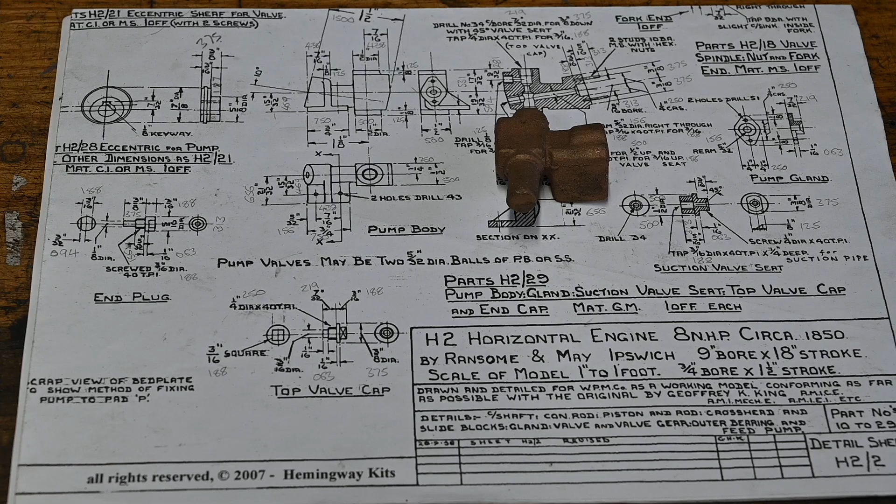Alright, today's project is the pump body, the gland, the suction valve seat and top cap. These are the little caps and end plugs, etc. This is the main part that you see here.

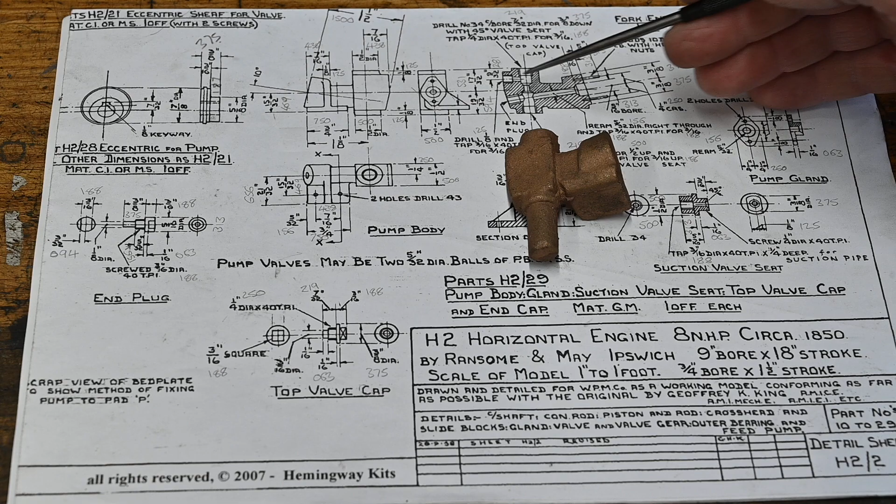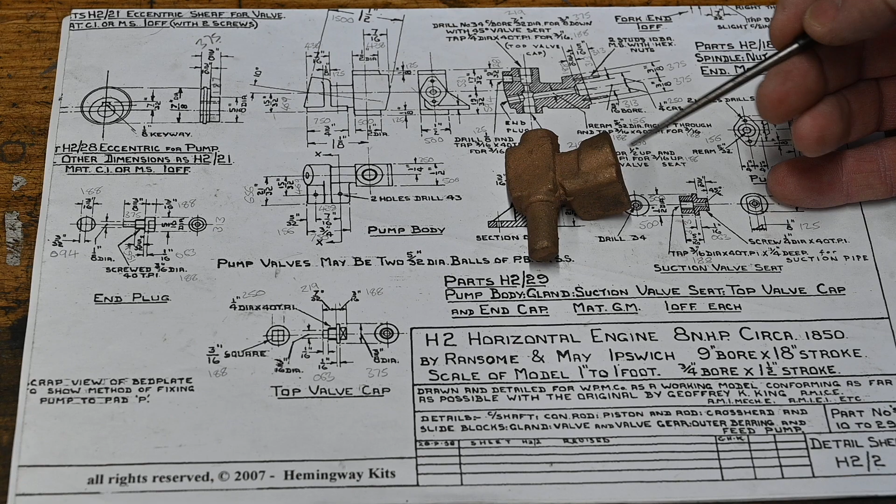Quite an interesting part. We've got a 10-degree bore through there. We've got one bore in that direction, one bore in that direction, another one in that direction. They're all reamed out to a larger size to accept a thread. Same with this end, and then there's also the pump gland which goes on this end, which is the rod that goes out to the eccentric.

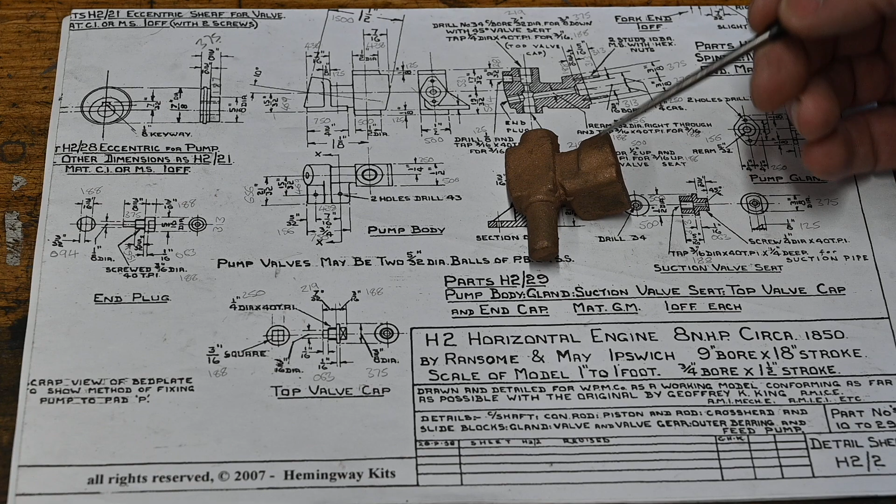There's the pump gland. I'm not sure how many of these little bits will get done in this episode. Depends on how long this takes me. Got a little bit of fettling to do on this casting first. It's got a tail piece for chucking it, but I don't really think I'll need that because I'm not going to put it in the lathe.

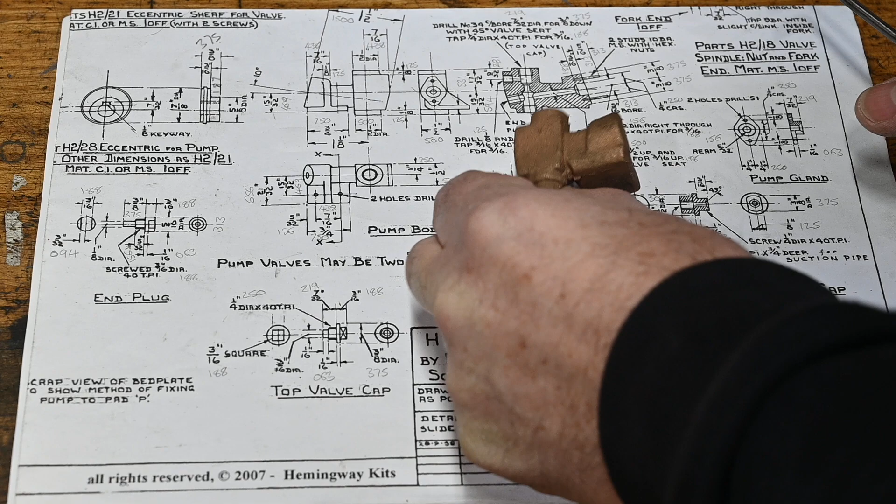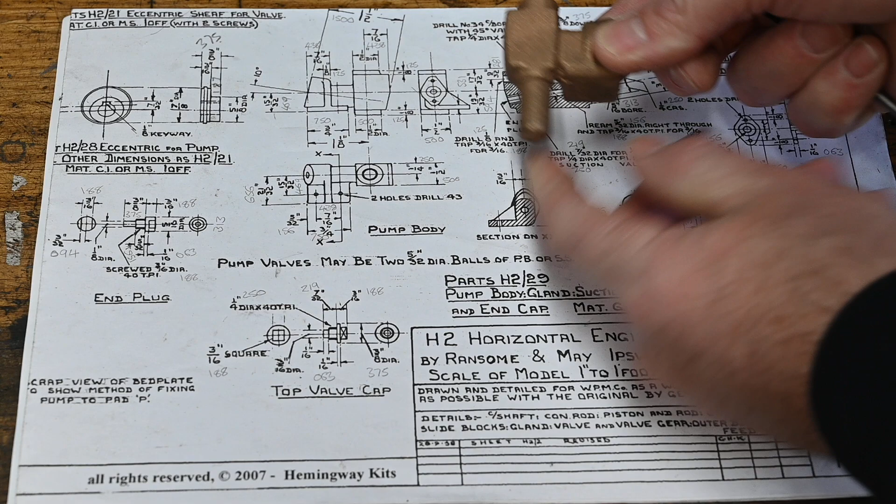I think I can do everything I need to do actually in the mill, and by chucking it, the only thing you can do is to turn that to a better round. So I may or may not do that, I'm not sure. It's not important. You can't turn this one to a better round because the foot, this is the foot that goes onto the mount, because the foot will hit the tool before the tool hits this bit as it spins.

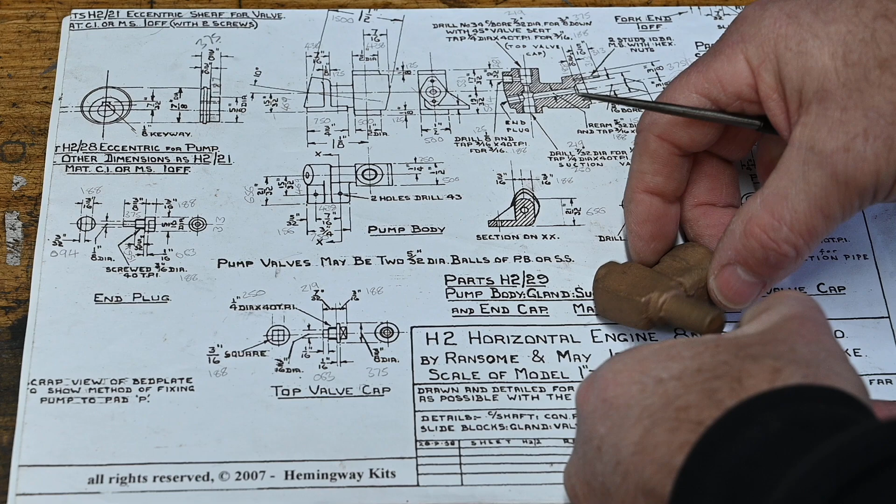So that's not really a great deal of use, so I might just cut that off and start directly in the mill. Right, so that's the orientation, that way for that way. So we'll get these faces machined off, get it fettled up a little bit, and I'll be back when I'm set up in the mill.

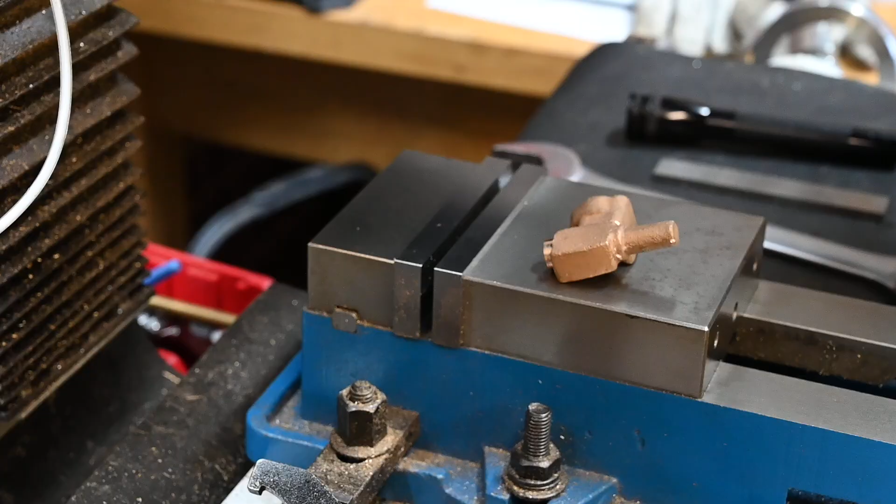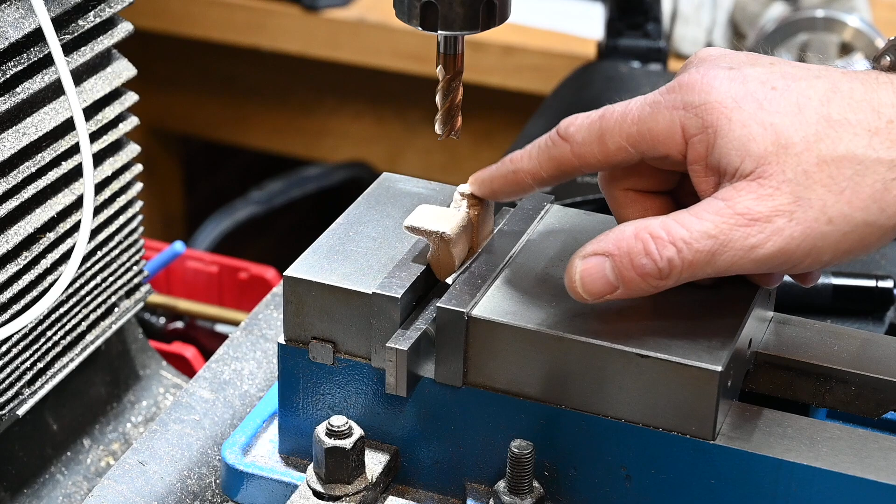I decided to put it in the lathe after all and use this just to create a little reference surface. So now that's my initial reference that I can use to get other reference surfaces when I start machining it. Right, I've got it set down on the reference face, so I can now machine this face, might take a skim off there. Although I can't see any benefit to that. No, I won't. I'll just machine that face and that face.

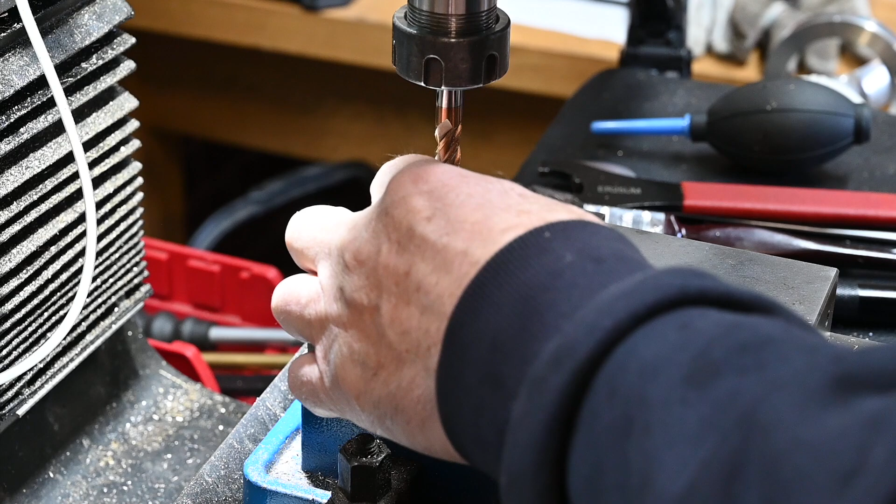I might take a pass along the back just to give me a reference surface there. Right, I've now got two reference surfaces there, a reference surface there, so I can now sit this edge down on the parallel along the back. And clamp on the other two reference surfaces. A smaller parallel in there.

Right, I could sit it on this reference surface that I've machined on this bottom edge, and I can clamp on these two reference surfaces in the vise. Now I can machine this surface as a reference surface. Reference surface complete.

Right, I now need to set this up to 10 degrees. So I've got my reference surface here that I can put against the back fence. Put that in there for now. I'm going to set it up on this ball bearing. Hopefully I can clamp it with that. Yep.

And now I want to set it to 10 degrees using this reference surface. So I'm going to put a parallel on the bottom there. Put my 10 degrees on there. Tap that into my 10 degrees.

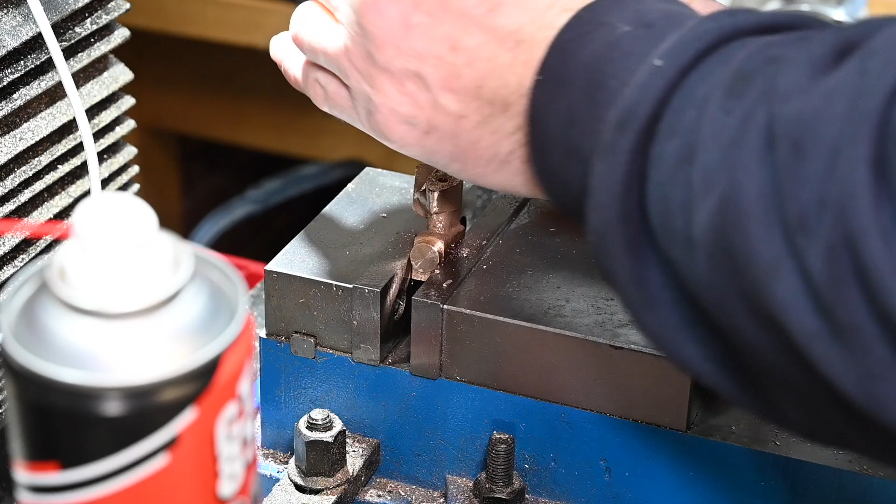During the reaming process, because this metal is what's called gunmetal, it's basically a cast brass or bronze mixture alloy, and it clogs up the flutes in the reamer. So what I'm doing is just stopping every now and then to remove the chips from the reamer using a little bit of aluminium welding rod.